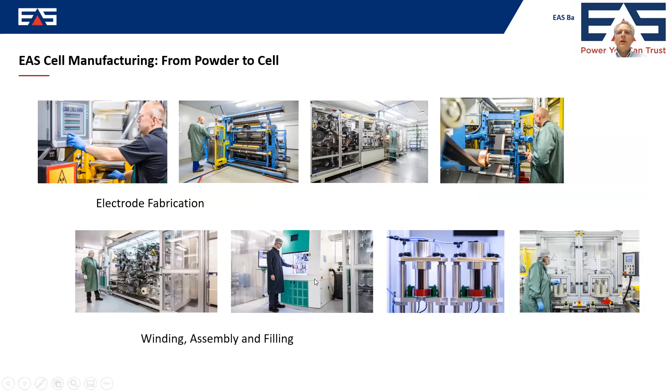The lithium-ion technology covers a wide area in terms of specific power and specific energy. EAS traditionally positioned themselves more in the area of high power cells, so high performing cells with high C rates, and less in the area of high energy, which is typically covered by the mass producers and then battery suppliers that go into the automotive industry.

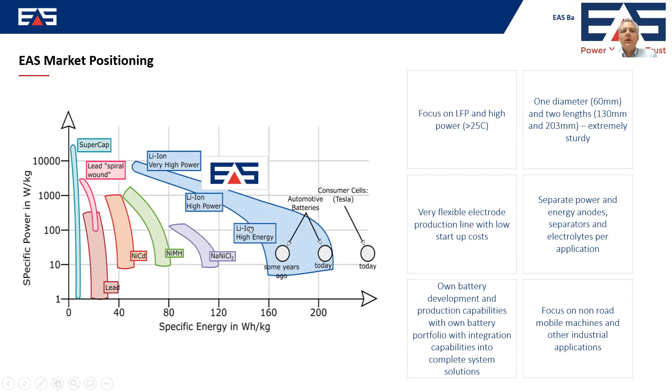Yeah. But in principle, the technology in-house is there to make all types of cells. But I just want to emphasize that lithium-ion battery technology is, of course, a wide range, and we can cover basically everything. But as a starting point for now, we are on the high power range. So in terms of cell portfolio, this is a rough overview. It's all cylindrical cells in different formats.

And basically these two, the 40 and 50 amp hour cells, are the main cells that we use in marine applications. So for marine applications, we decided not to go with the NCA technology. That has different reasons. First one is safety. Another one is cycle life. And the third one is everything around sustainability and availability of non-poison materials.

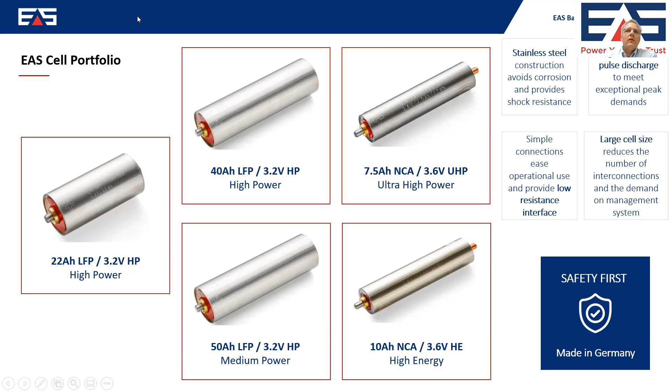So lithium iron phosphate is not having any nickel parts, no manganese, and of course no cobalt. So this is a pretty environmentally friendly technology as well. So taking an example of the 40 amp hour cell, this is the core cell that we are currently using for our battery system.

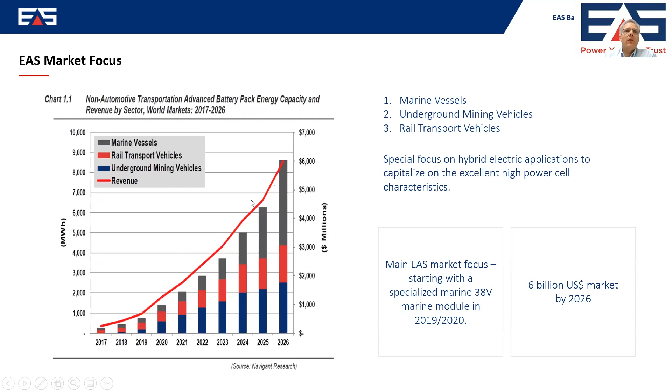In terms of market approach, I mean, this is probably a well-known picture. So the market for lithium-ion batteries is permanently growing. Marine, rail, underground mining, these are particular markets we are looking at, with a clear focus though on the marine vessels. So the solution we developed is called EASy Marine.

And before we go into a little bit more detail on the system specifications and the system features, I'd like to give just an overview of what kind of a wide span marine applications actually have. That goes from spinning reserve, load reduction, peak shaving, to full electric ferries, hybrid systems, hybrid ferries, electric cranes, so everything around port infrastructure and materials handling. And of course, as always, there is no one solution that fits all.

So for full electric ships, for example, the classical case is start in the morning, discharge slowly, and recharge overnight. That's a typical high energy application. So you need a high energy dense cell. Power performance of the cell is, let's say, second priority. But that's a typical classical full electric ship application.

If we go more into specific stuff like fault ride through on a hybrid system, spinning reserves, load leveling, or shore stations for fast recharge, everything around peak shaving or energy recapture, and finally, flexible dynamic propulsion, the more we go in that direction, the more high power and power performance in cells play a crucial role.

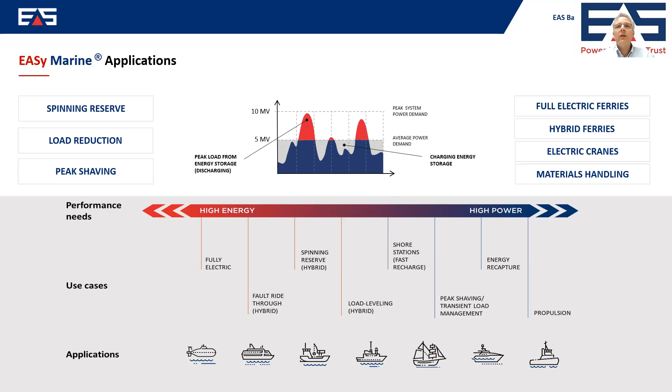So full electric does not necessarily mean always only high energy densities. So even in these particular cases, you may need really power performing systems. So as an example, marine electrification. Ferries are a typical business where hybridization starts. The leading country, this is also well known, I think, is Norway.

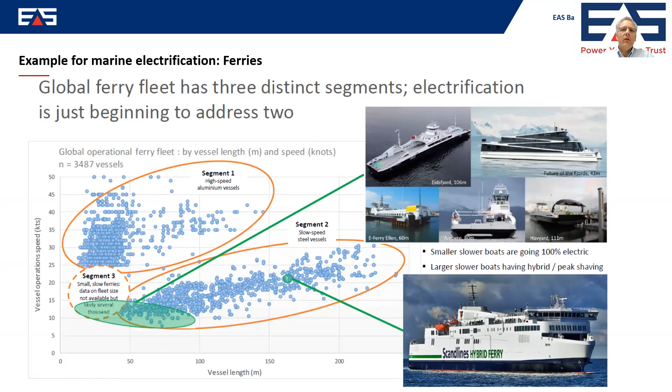And if we look at the typical vessel types and the different segments of marine applications, we see that most segments are not really addressed currently. So there's a huge potential for doing much more with battery systems on board of ships. Our focus is mainly on hybridization of systems, so we are not exclusively looking into full electric systems. We are looking more at the hybrid systems, because this is where medium power or high power applications come into play.

The advantage of a hybrid system is, of course, the unlimited range. The range extension can always be done by liquid fuels such as diesel, H2, LNG, whatever. So there is no limit in range, but there is of course a lot of potential for using, for example, diesel fuel much more efficiently.

If you level the load production of a diesel generator system, for example, and you level all the fluctuations by a battery system, you can run the diesel system much more efficiently. So depending on the type of ship and the load changes and fluctuations, it can be up to 30% reduction of diesel fuel, just by adding a battery, which does all the work of taking energy if there is too much and boosting energy if there is not enough. And the diesel runs smoothly at the same sweet spot always.

You've got, of course, a lot of freedom of design. New and more efficient ship designs are possible. Savings already mentioned. You may even reduce the total size of the classical propulsion system. Maintenance is something which can be reduced because the runtime of the diesel generator system can be reduced.

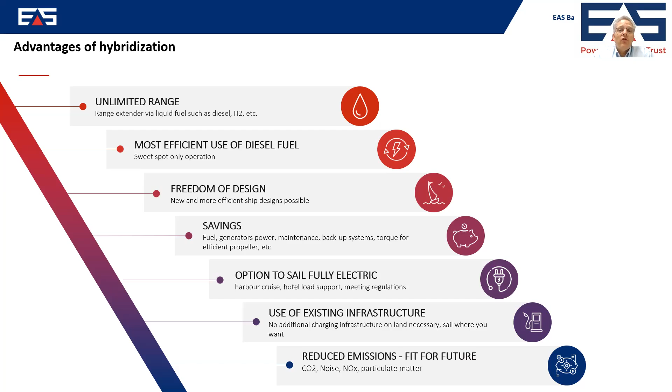So as an example, our aim was not just developing the same battery logic and the same battery system as always available. One speciality is that we're using LFP. This is not really new, but it's not commonly used. And we wanted a very flexible mechanical approach, so that the battery will fit also in existing ships and ship types, rather than forcing the ship to be entirely redesigned because a classical rack doesn't fit. So our aim was that EASy Marine should be easy to handle, easy to operate, and particularly easy to maintain.

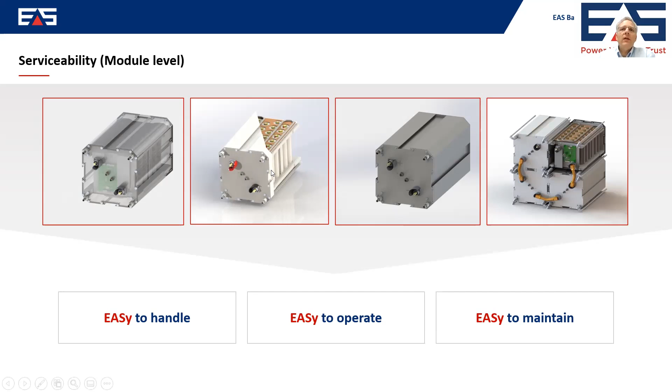So the whole system consists of these battery cubes, which are combined into battery systems in the way the space on the ship requires. Here are some configuration examples. I think a nice description is that this is like a Lego system for adults. You just put it together as you like.

This system is easy to fit into the existing structure of a ship, especially for retrofits rather than new builds. It is easy to operate and also easy to maintain. You can access all parts from the front, so there is no need for complicated maintenance work. Things are kept as easy as possible.

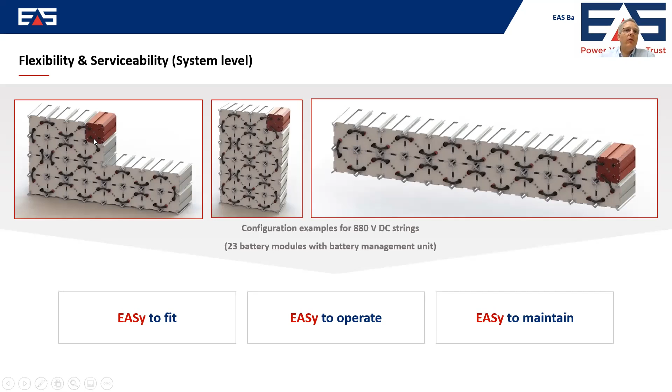What you see here as an example, the red part is naturally not red, it's also white, of course. But this particular part hosts the BMS. We build strings of battery modules to apply a certain system voltage. And each string has a master BMS, which has the same format as the modules, so it can also be integrated into the mechanical structure.

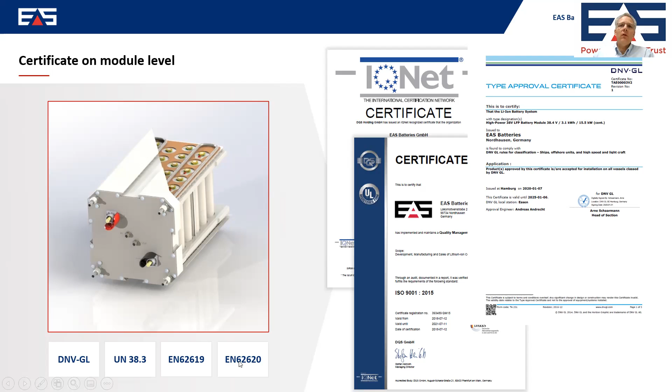What's needed to get this on board a ship? So the first, of course, most important thing is the DNV-GL or DNV certification, how it's called today. UN 38.3, that's the transport certification. And what I also mention here is two particular norms out of the ES-TRIN norms in Europe. And this is important if you go on inland water vessels. So we also certified the system according to these two relevant norms for inland waterways.

So how is the electrical design organized? So as in every battery system, you generate a certain amount of modules that you put in series to get the system voltage. And the size of the battery you organize by putting these all in parallel. So that's like a matrix structure. So the big difference in EASy Marine, though, is that mechanically, this design is completely disconnected from the electrical topology. So you can spread the parts where there is space at the ship, and just by doing the right cabling, you generate this electrical topology.

Maybe some comments on the capabilities of the modules. The battery system voltage on a system level is currently limited to 1000 volts. However, the modules itself are prepared for string length up to 1500 volts. So whenever there's a need for higher voltages on a ship, and there seems to be a trend for that, the battery system, at least the modules, are prepared. The only thing we would need to do is to redesign the BMS to meet the higher voltage requirements.

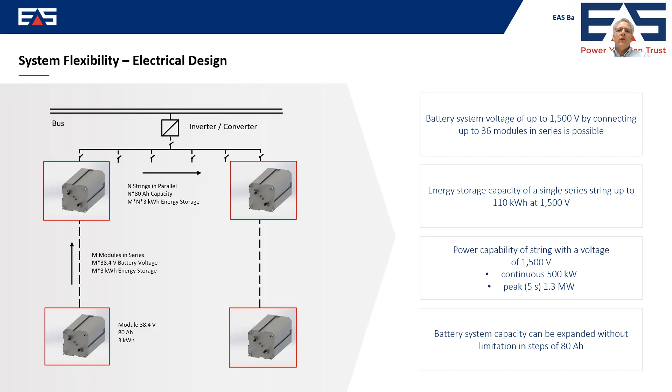So in terms of power performance on module level, on cell level, it's much more on module level. We have discharge rates of 5C maximum and 3C charging rates continuously. We're not talking about peak power. Peak power is much higher, but on a continuous base, we can discharge with 5C and we can charge with 3C. So this is definitely best in class in the industry.

So maybe some comments or information here why we use LFP. LFP is, as mentioned, not only a very safe technology, so it simply doesn't burn. So if there should be a thermal runaway event in the battery, there is no fire involved. So we could prove that in different and various tests, it simply doesn't burn.

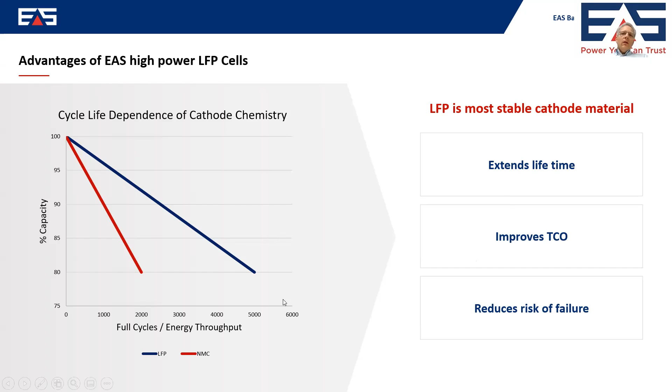Next to the safety aspect, there is also a big advantage in terms of lifetime. So if we do full cycles, and full cycles at LFP means really from 0 to 100 SOC, we can achieve about 5,000 cycles. A typical NMC system, which is normally used, has limits at roughly 2,000 full cycles, if we really do the full cycles. So we have an extended lifetime. Therefore, as a consequence, we have an improved total cost of ownership, even if the systems initially are a little bit more expensive. Over lifetime, the amortization is, of course, much better, and it reduces a risk of failure because the system is very safe. Yeah?

Next to that, there is also an effect which is also worth to mention, but that's physics or chemistry. That the higher the average temperature of the battery is, the more the lifetime of the battery goes down. And as a rule of thumb, if you have something like 10 degrees in average higher temperature in the battery, that reduces the lifetime, and this is more like calendar life, by 50%. So it's very important to really make sure that your system has a very stable temperature regime.

That's why we did two things. One thing is, of course, using high power cells reduces the heat which is generated within the cell on one side. And we apply a liquid cooling system to ensure that the temperature regime within the battery modules is pretty stable and reduce the average temperature over lifetime significantly. This combination allows high rates for continuous charge and discharge. If you would do that with a high energy system, it will really heat up significantly.

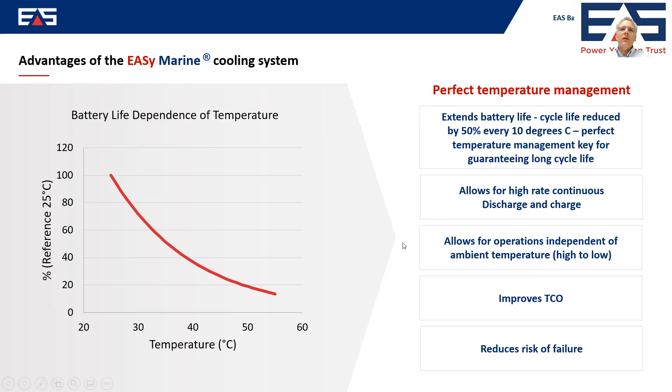It allows the operation independent of the ambient temperature. So we don't need, let's say, AC for cooling the air that's used to cool the system. We just use water. In most of the areas in the world, we can simply use the water which is available outside. The temperature is low enough to have a cooling path, which also improves the TCO and, of course, reduces risk of failure. So that's also a reason why we chose to go for a liquid cooling system.

So how is a ship battery usually developed? The entire chain starts from the material. That's what we buy. We make the cells according to the needs of the application and the system. We build the modules, we build the battery layout, and we do part of the system integration. So basically the right part, from material to battery layout, is something which we cover fully within EAS Batteries.

And that's unusual because most of our competition, if not all, are using cells supplied from Asia. So they're not doing their own cells, they just do the systems. So we have the full chain under control. If there is a need to adapt the cell, we can do that. If there is a need to keep the cell available for 20 years, we can do this as well. So we're not depending on any supplier of cells. If they make any change, we'd have to adapt. We can still keep what we intend to do.

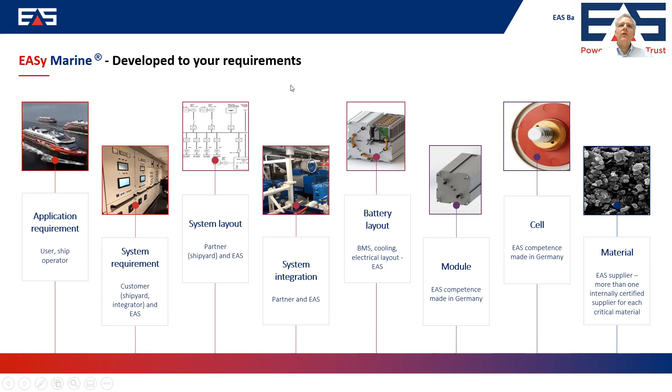On system integration, things come together from the left side, from the application requirements, which leads into a set of system requirements and a system layout. And the system integration finally is the critical part where all things come together in applying and integrating a battery within a hybrid system or propulsion system, whatever. Yeah, and this is something which we do with partners, and we are also always looking into new partnerships, to make sure that partners understand how our systems are working, how such a flexible system can be integrated in a ship from a mechanical and electrical viewpoint.

Okay, finally, why EASy Marine? It has the highest power in class. If there's a need for high power ratings, as mentioned, see peak, it's a perfect choice. It has the lowest price per kilowatt. So if you're looking for power performance, this system comes with a pretty efficient and economic number.

It's the most flexible architecture in the market. It's fixed and there are no racks needed. So if you have limited height or even intermediate decks, you can fill them with a battery system because you don't need a rack. You're not limited to certain minimum sizes. You're just flexible. It's a very safe and reliable chemistry. So there's no fire, no propagation, and highly enduring cells. And EAS Batteries as a company is highly vertically integrated. So we start from cell, block, battery system. It's basically a one-stop shop.

So having said that, I just want to go a little bit back in our history. We started to do marine battery cells already in the past. These were all individually developed cells. So this is not based on EASy Marine. This is something we did individually for particular applications.

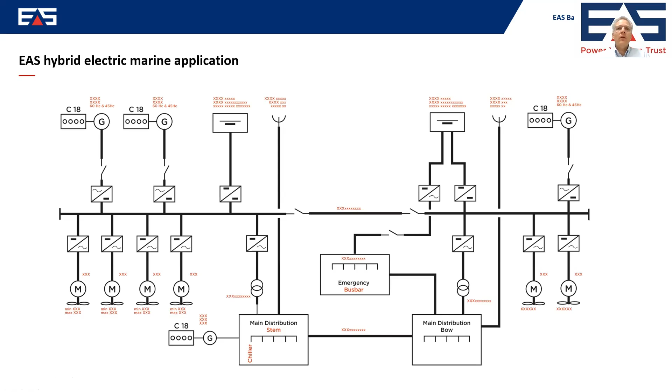But it gives an example how hybridization could work even in complex ships with a lot of driving electrical motors that drive propellers for maneuvering, for thruster systems, and so on and so forth, and also for the supply of the electric systems on board, like the kitchen and all the stuff around the cruising ship.

Okay, so coming to the end, what I'd like you to take home actually is the lithium-ion battery technology is kind of a revolution. Everything becomes electric. That's the long-term view. There is no new storage technology in sight that could outcompete lithium-ion in the near future. Even if you read some nice developments on lab level, for the time being, lithium-ion will be the main, let's say widespread battery technology for quite some time.

There are multi-billion euro markets beyond automotive, often with a much better return on investment. Automotive cell designs and cell specifications are in general not suitable for industrial application. And I give you an example here, which is linked to the cycle life.

If you think of a car having a reach of 300 kilometers, then 1,000 cycles would mean 300,000 kilometers of range in total over lifetime. I think most of us agree that this is more than sufficient for a car. This simply means 1,000 cycles is enough for a car, but it will never be enough for a ship.

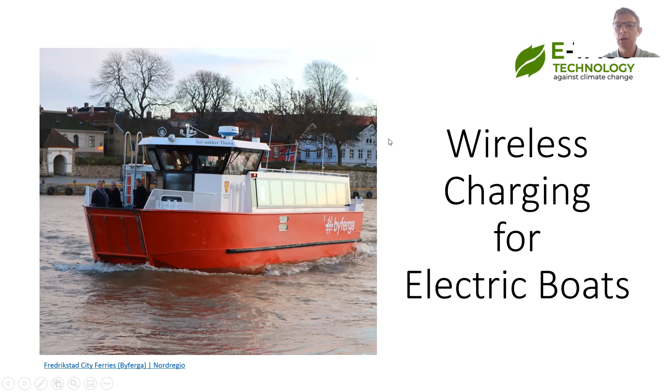So it's about the wireless technology in this case for electric vehicles. What you see here as an example is the Fredrikstad City Ferry in Norway that has been fully electrified by the company IPT, but I'll come to that in a little bit. First of all, about myself. I'm in the industry of electrification for more than 25 years. I've been CEO of numerous companies in the industry, but also for the car industry, this technology, wireless technology, is an interesting thing. And we've realized a lot of projects in various applications over the years.

Typical examples are forklift trucks, cars and vans, where power requirements are rather low, where charging of the battery happens in areas of, let's say, 1 to 20 kilowatt of power transfer, which is rather on the low end. But there are also companies in the market that have specialized into higher power, and you find applications for buses and trucks like London, Madrid, and other parts of the world where I've been involved, but also ferries like the one in Fredrikstad that was realized with the company IPT.

First of all, about the wireless technology. The wireless technology is a rather old technology. In the 90s, numerous pioneer companies developed the first wireless power transfer systems. Some of them we can name is the company Vahle that worked together with the University of Braunschweig to develop systems, but also the company Wampfler AG that had a cooperation with the University of Auckland. That happened in the early and mid 1990s.

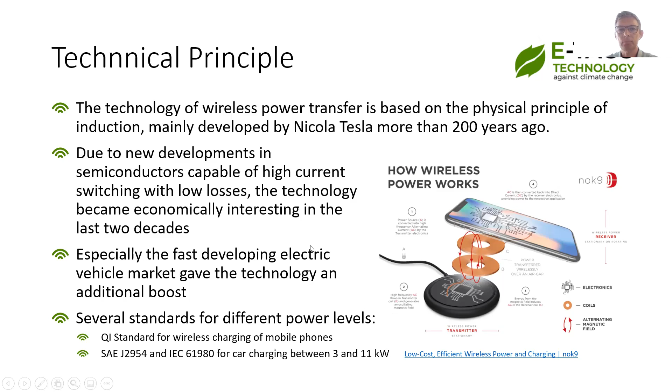What does a wireless system look like for charging electric boats and ships? Well, you always have to distinguish two parts of the system. One part is everything that goes onto the ship or the boat, and the other is the shore assembly. The two systems also have to be designed to completely different standards. So it's a bit of a tricky situation for the companies. They have to be capable of dealing with both worlds here.

You typically have on the ship a pickup, which is usually a coil picking up the electromagnetic field generated on the primary side. And this coil generates a high frequency current that is led through the wiring inside the ship to a rectifier. And this rectifier converts the power from high frequency AC to DC that is compatible with the charging voltage that the battery pack requires. So it can be designed in different types.

Typically nowadays, you find battery packs mainly coming from the car market in the range of 300 to 400 volts, or up to 800 volts for higher power applications, and especially in ships. I presume that high power applications will be more predominant, and that's why this is probably going to go to higher voltages. Just like Frank mentioned, it will probably stay below the 1000 volt level, mainly because of standardization and homologation. But a higher voltage requires lower cross sections in cabling, and this saves costs in the end if you can comply with the voltage standards.

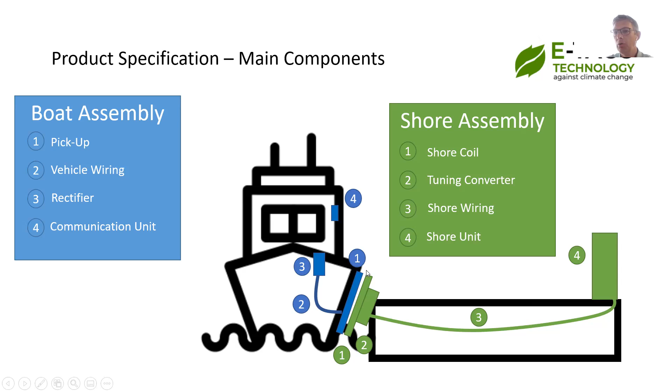The whole system needs to communicate between the vessel and the shore assembly system, mainly because you always want to make sure that you only generate the power on the shore side that is really needed by the vehicle. So the state of charge of the battery defines the power requirements of the ship, and once that is determined, the shore assembly automatically generates this power level that is required to recharge the battery in the most efficient and fastest possible way.

For maritime applications, high power applications above this 11 kilowatt, there are very few companies that have realized systems so far. One of them is the company IPT Technology that I worked for. It's a spin-off of Conductix Wampfler, and they can realize systems that can transfer up to 200 kilowatt of power. And one good example is this Fredrikstad ferry in Norway that is operational since 2019. So it's not a prototype system. It's really a system that is in everyday use.

The second application that we find, the company Wärtsilä producing ships in Norway, has tested a wireless charging system at a hybrid coastal ferry, a much bigger vessel, in August, September 2017. I think this system is not operational anymore. It was only installed for showing the possibilities of such a system. They claim that up to 1 megawatt of power transfer is possible, but I believe this is to some extent questionable because it would require a very, very heavy system.

And it's also in all cases important that the higher your power transfer is, the more complicated it will be to control the electromagnetic field. And the electromagnetic field needs to be controlled in order to make it safe, because for electromagnetic fields, there are standards that limit electromagnetic fields, especially when humans are exposed to them. So you have to be very knowledgeable about electromagnetic field design if you manufacture systems like these.

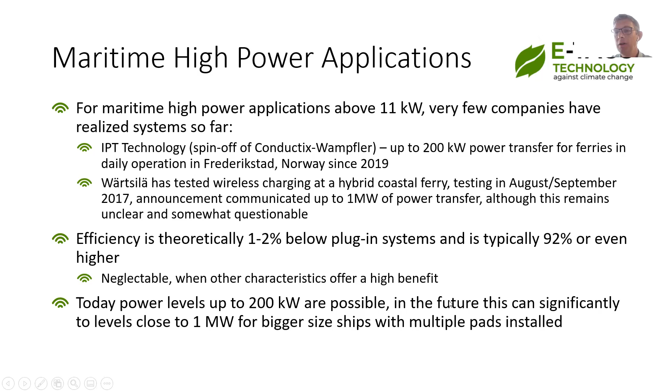If you apply this system on a floating dock, then of course you can eliminate all those changes, because the ship and the floating dock have a similar movement, and the typical tolerances of a wireless system can be easily maintained in this scenario.

The good thing is that you have no live open contact, because everything is completely enclosed. The electromagnetic field goes through air, and that means it's completely sealed. You have no risk of short circuit with water entering, and you have no corrosion whatsoever. That's a really big advantage of a wireless system in a maritime application.

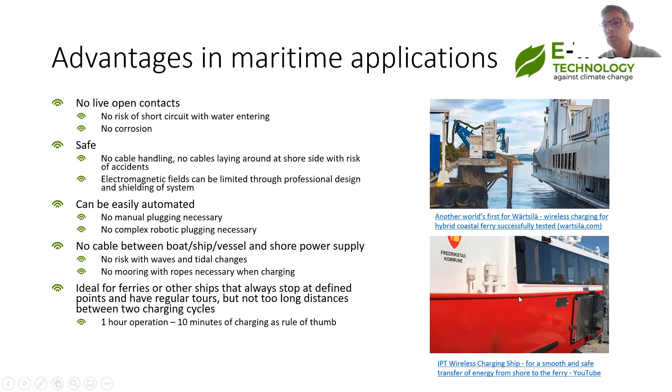What we see in most of the applications is that with 10 minutes of charging, you can run the system for about 1 hour. For a typical passenger ferry like this that is more than enough, because the transfer time from one stopping point to the next is usually significantly less than an hour in these applications. And the waiting time at one point is typically 15 to 20 minutes for the people to board and leave the ship.

What is the typical project timeline that you need for realizing such a system? Typically you need to do a very thorough analysis of the application to really make sure that the power requirements are clearly defined, and the battery sizing can be done thoroughly. And then you can define the charging power and the location of the chargers.

There's a lot of variables around that, and to find an optimum solution not only relates to the ship size, the battery size, the charging power and the locations, but also the availability of power from the grid side, etc. And all of that needs to be combined, and that usually takes about 3 months.

And then you need to do a lot of detailed engineering and integration planning for the boat or ship side. That typically takes roughly 6 months. And you need to do engineering and planning also for the shore side, including the grid connection, which usually is a bit quicker because the limitations in space are less tricky, and that's why around 3 months should be fine.

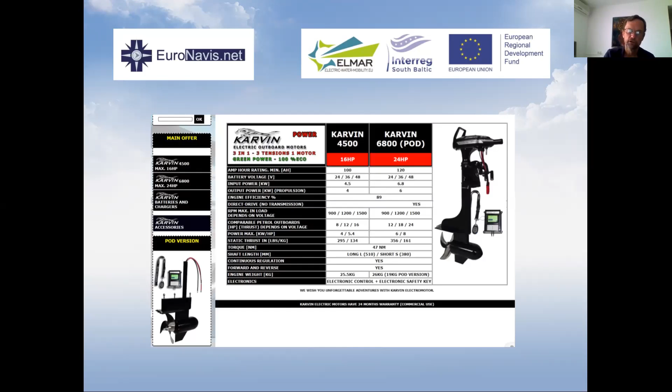Karvin is a Czech Republic manufacturer of electric motors and batteries, a smaller manufacturer. They have a few types of outboard motors and pod versions, equivalent to 16 horsepower or 24, and they supply batteries for those engines, lithium and NMC, and chargers.

Also, we're starting to cooperate with E-Dyn Marine, innovative solutions of electrical propulsion technique in the field of nautics from Slovenia, enabling people all over the world to enjoy pure and more environmentally friendly water mobility. And Sunware, a German producer of solar systems and panels. E-Dyn has a wider

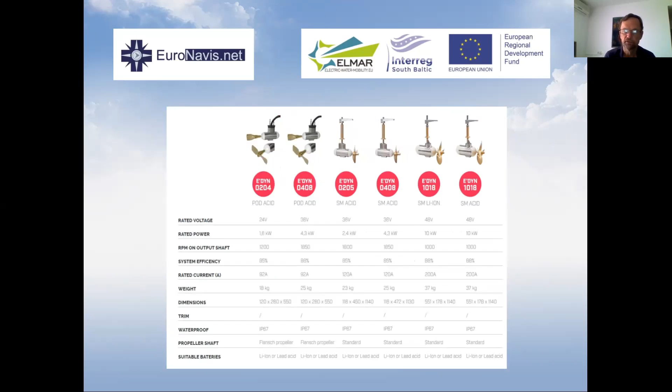panel of products, outboard engines from a smaller 2.8 kilowatts to 20 kilowatts, pod versions for sailboats similarly from 1.6 kilowatts to 10 kilowatts, and classical inboard engines for larger boats up to 150 kilowatts. And of course, they also supply batteries and whole systems for boat retrofitting.

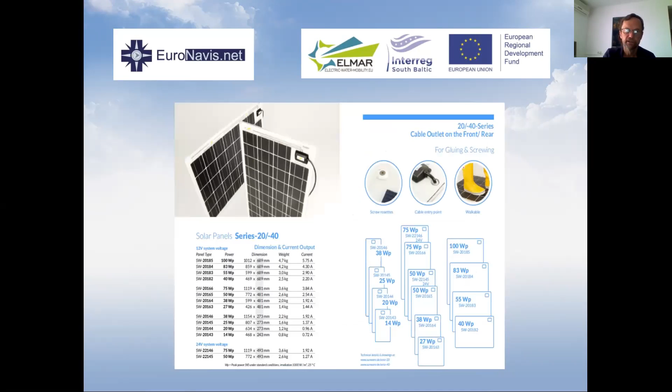And this is some example of Sunware solar panels, which are high quality, possible for gluing and screwing on the decks and superstructure.

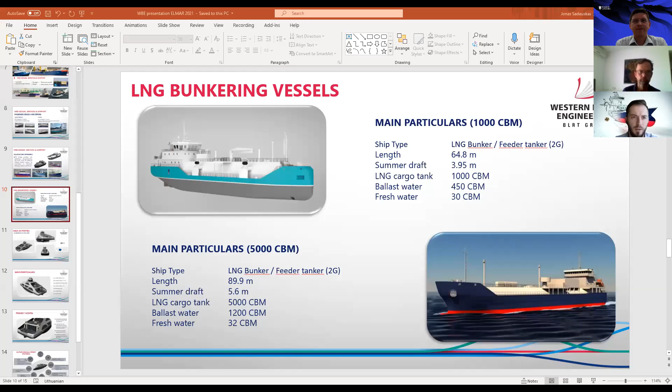Yeah, can you see it? Yes. Okay, so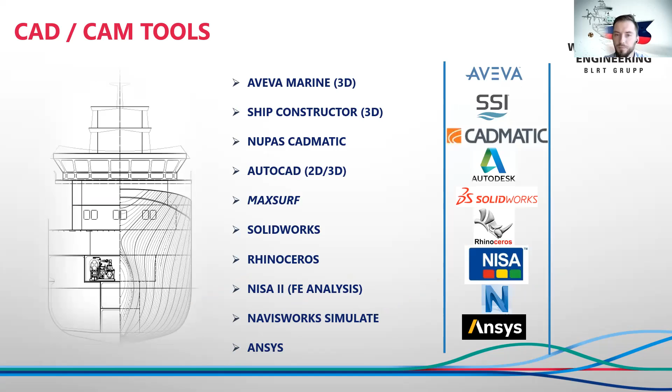One of our key points where we are looking forward as a company is LNG bunkering vessels. From the demand for and building of LNG vessels in Asia and Europe, we can see that bunkering will be highly needed in the upcoming years, also in our Baltic region. So we have made two concept designs, for a 1,000 cubic meter LNG bunkering vessel and a 5,000 cubic meter bunkering vessel. Of course, dimensions can be changed and adapted for the client's purpose.

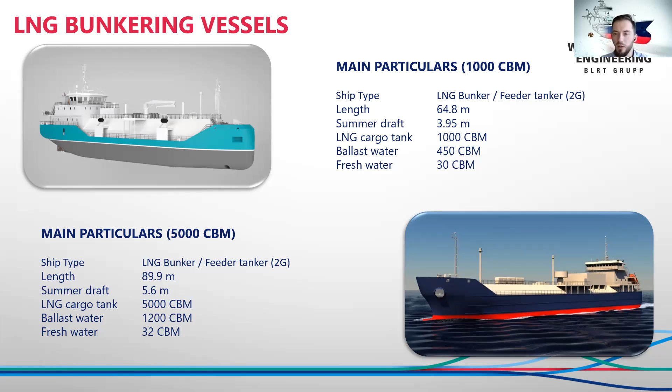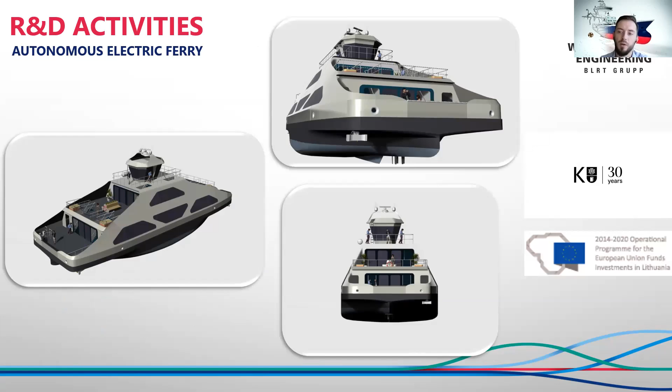Now let's talk about our research and development activities on an autonomous electric ferry, which we developed together with our great partner Klaipeda University, funded by the operational program for European Union funds investment in Lithuania. The main particulars of this vessel: length around 35 meters, it carries 300 passengers and 40 bicycles, preliminary speed 8 knots, and it's basically for our Baltic region, for Lithuania.

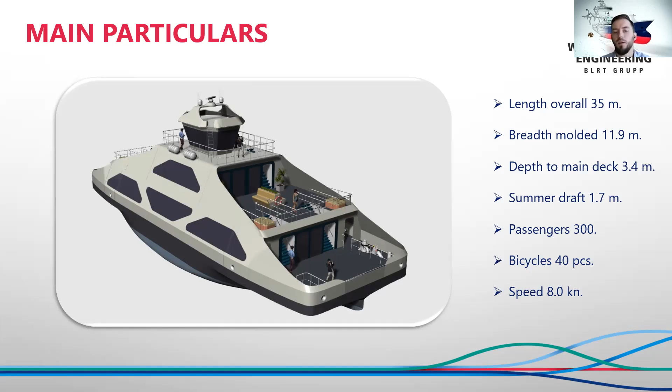Project scope. This project is an innovative hull form for electric passenger ferry development. We want development and optimization of the electric propulsion complex, for an autonomous ferry. The autonomous system has to be integrated into the ferry, with autonomous maneuvering, testing, and a prototype.

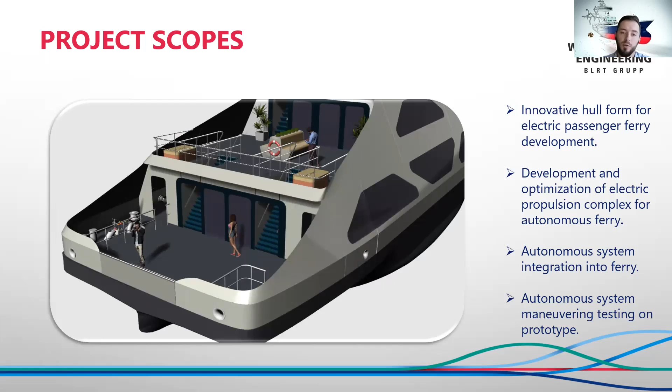So it's really sad that our project manager is on holiday, because as per the previous presentation, I believe that she will contact our colleagues about batteries and all other systems, because it's highly needed right now, because we are thinking about how and when we can install the system. So I think later on she will contact.

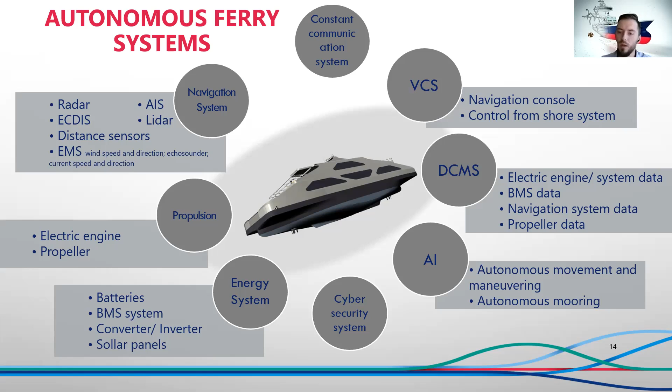And also, if we return to the presentation, the propulsion system, electric engine, and navigation system. So that will be it, shortly, for autonomous ferry systems. And for the end, let's design future ships together. So that will be it, shortly, for Western Baltic Engineering. Okay, Jonas, thank you.

As far as I understand, you are still in search of the components for the electric ferry. Yes, because it's still under negotiation how the batteries can be charged, because it's a short route between Klaipeda and the Peninsula, so it's a short time standing at the quay. So this is the main, not a problem, but a good question for our engineers.

Yes, when we take into consideration our ferries' operation regimes, generally they stay by the quay around 10 minutes, I believe. Yes. And when you also spend time connecting, this becomes really small time to charge, meaning either you should charge once an hour or once in a few hours, or there is another possibility that Daniel was presenting. Yes. That you are charging each time you come to the pier, topping up the batteries to the necessary operational range. Yes. That could be a very nice solution for this ferry.

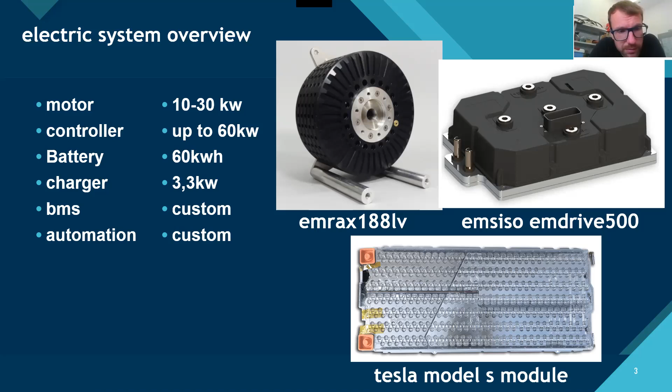So it can even be forced up to 30 kilowatts, but we don't need that power. We built the battery from Tesla battery modules. In total, theoretically, it's 60 kilowatt hours, and only the charger is limiting our charging capacity. We have 3.3 kilowatts of charging power. It takes about 16 hours to fully charge our battery. And there are some custom-made battery management and automation systems.

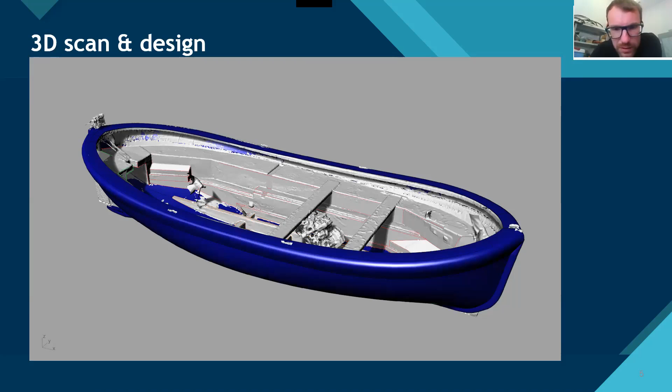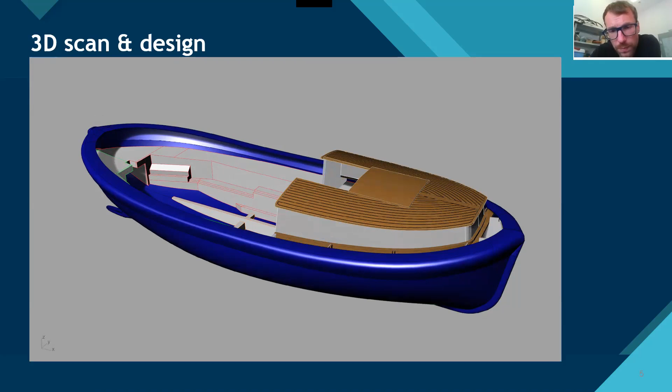Okay, so the very first step was to do a 3D scan of the hull. Here you can see the raw data. Then, through those scanned points, the hull was modeled with Delftship software, and then on that model all existing planes were designed, and from that stage the design was started. So we designed a small cabin, the open deck with the steering wheel and console.

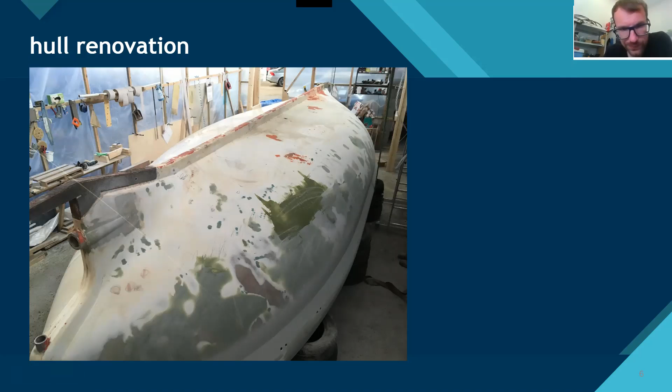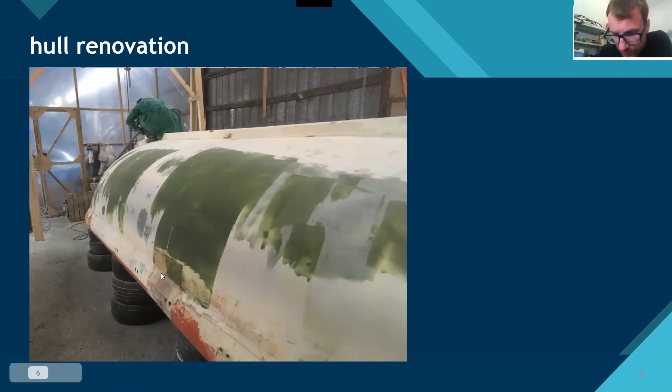Here you can see the big areas of filler covered. And here you can see the cracks. All those cracks, not the biggest ones, but all those cracks are fixed. The poor condition glass fiber was removed and covered with new one.

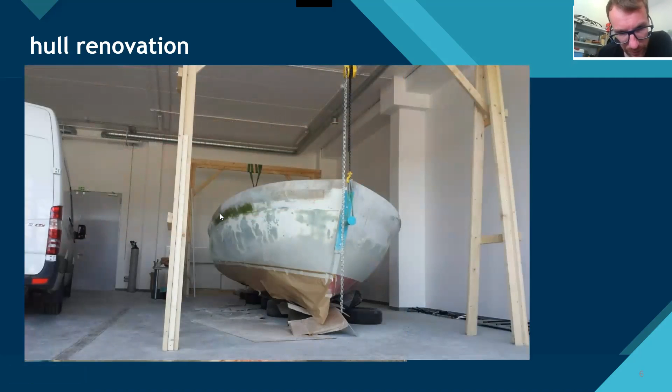After that, we covered it with primer and then with anti-fouling, and then we turned it back to normal position and continued to fix the sides and the edge. It took a very long time, and we spent many man hours to do this.

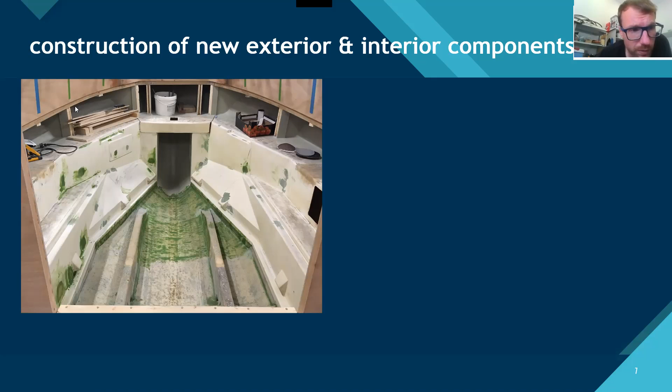Next step was to work with interior and exterior. Here we cleaned and filled it with filler. There were some cracks also inside because the hull was left in an open area all the time, and it was full of water, so everywhere were cracks. So we fixed that and then started to install wooden constructions, supports for cabin, for seats, for some storage space.

Everything is sealed and covered with epoxy resins to make it durable for moisture and water. This is the bottom, preparing for the bottom. There is some image of the deck. Inside the deck there's only preparing. This is a nice and easy technology how to make the contour of an existing part, and after you can cut very nicely.

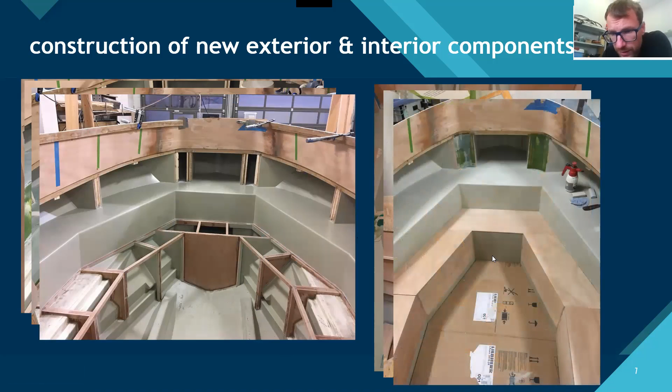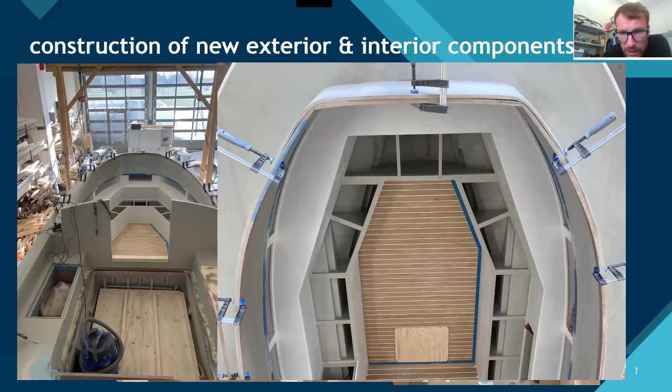The outside works. There were many challenges because of the water, how to make the water go not inside the vessel as usual for that kind of vessel, but go directly outside.

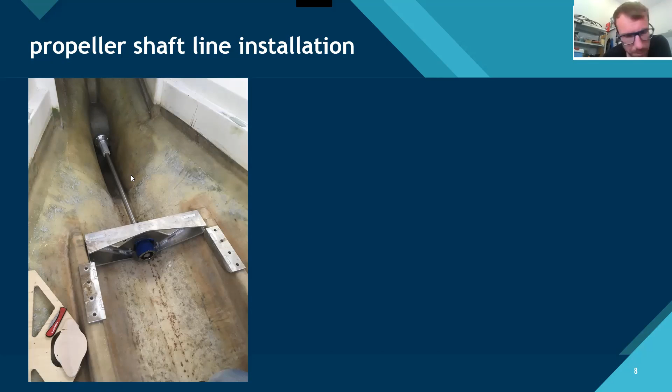Here you can see the propeller shaft installation. There was also some challenge. This is the thrust bearing installed, and we needed to make some link angle here because the propeller shaft is straight and the motor won't fit there. So we installed an angle joint for the shaft. Here you still can see the pictures of the thrust bearing installation. It was done very precisely to avoid any vibrations.

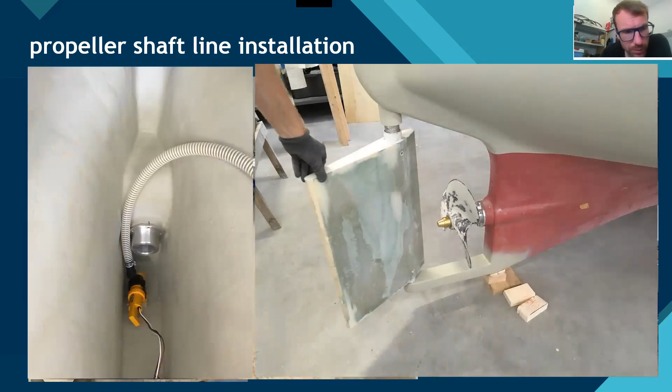This is still the old propeller. Bilge pump, still installation. This is the motor. We chose to use a belt drive. It's silent and low maintenance. We are happy with it. Works very fine. The motor also, I think, has enough torque to spin the propeller, but we did some reduction because theoretically it should be more effective.

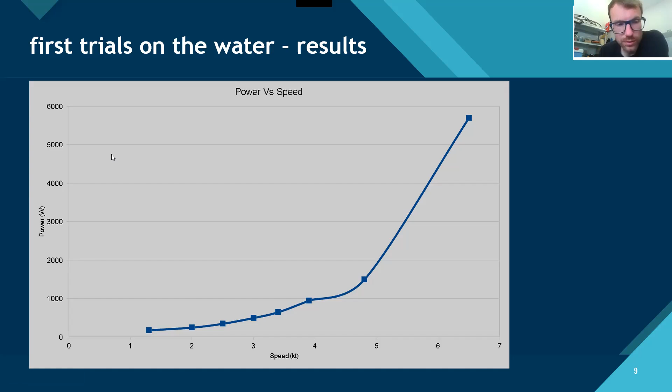We still don't have very much data collected yet, but the results are good for us, and we will continue to test the system. And here you can see the results of our short test on the water. With 6 kilowatts, the vessel is sailing even faster than its regular cruising speed. So I think 5 knots is a very good speed, and with that speed we use only 2 kilowatts of power. It's not much.

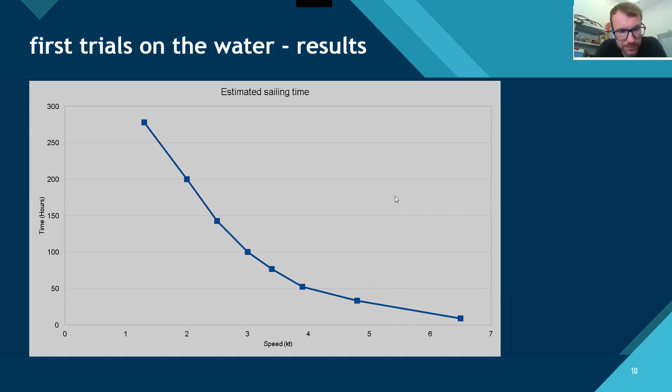And here you can see the estimation. It's only theoretical, not tested yet, but I think it can be something close to that. The estimated range is still only theoretical calculations.